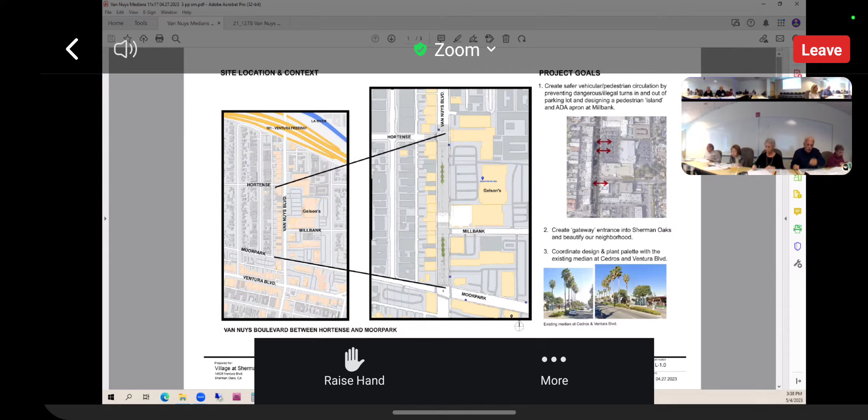On the lower red arrow on the first page of that image, that's where the ADA ramp and pedestrian island would be. If you turn to the second page, you'll see the two medians, and the image at the top shows the pedestrian island along with the ADA ramp. On the third page, you'll see a blow up showing the proposed ADA ramp, and in the middle of the street you see the pedestrian island, so that if somebody can't get all the way across, they have a safer place to stop.

When we presented this to you two months ago, we did not have the pedestrian island and we did not have the ADA ramp. So that has been changed as part of this proposal.

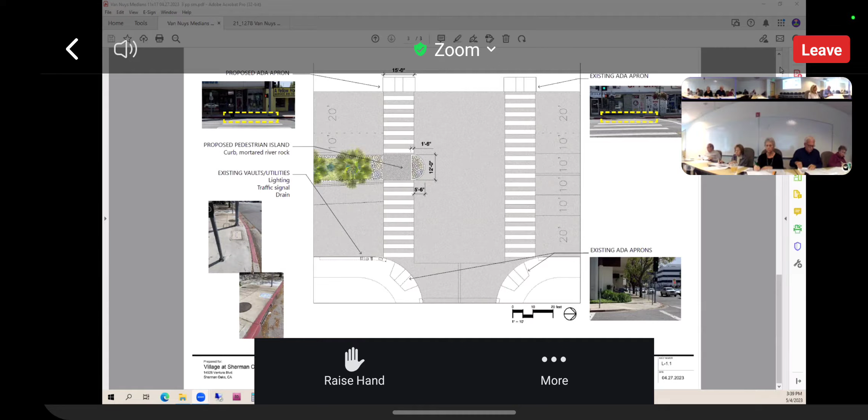We feel there's a multitude of benefits for this project, both in terms of safety for cars and pedestrians. There's also stormwater retention, and carbon capture because we're planting new plant material. We're really enhancing the beauty of the shopping district in the heart of Sherman Oaks with these two medians, and we're improving the wayfinding. There'll be a welcome sign as you get off the freeway coming into Sherman Oaks, so you'll have a sense of place for this part of the commercial district. I'll stop there and answer any questions.

Has DOT looked at your plans? Yes. We had a meeting with Mehmet and talked to him about these improvements and what we were planning on doing. We've also spoken to Tim Fremo at Los Angeles DOT about this.

We have support, including letters from the Sherman Oaks Homeowners Association, the Sherman Oaks Neighborhood Council, and the Vision Committee, which is part of the Plum or Land Use Committee for the Sherman Oaks Neighborhood Council. So there's three letters of support, not to mention that the Sherman Oaks BID, which is proposing this project, is behind it.

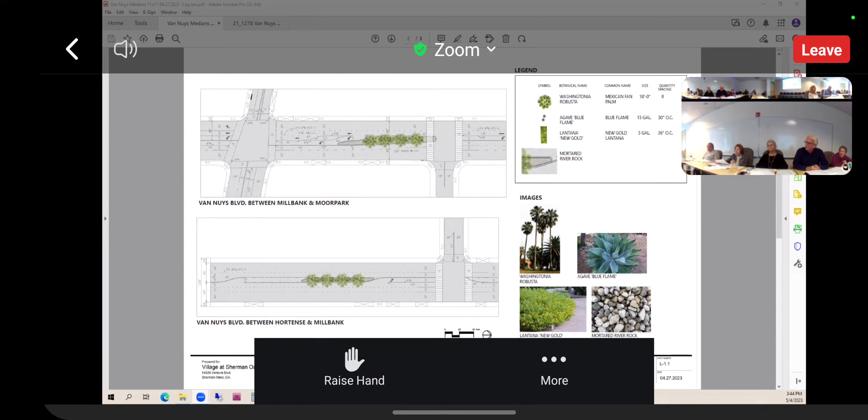We could change the word to storing it, as in a swale - well, there will be a swale, but it'll be a contained island. You're not taking additional water from the road. Right, we wouldn't want to do that.

Will there be any sprinkler system in the median? There will be - these are all drought tolerant plant material, but there will be a drip irrigation system.

Could you do the curbing so that it's able to absorb some additional water underneath? I don't think so, because at that point in the road, it's crowned.

It's crowned, and goes the other way - the water is running to the side, it's not running into the center.

But when you're putting in the curbing, you're going beyond the curb - you're cutting the asphalt, so you could do it. I know DOT will get in the way, the BOE and DOT will get in the way of that. Because if you're cutting into the road, you're only overcutting in order to put in your curbing.

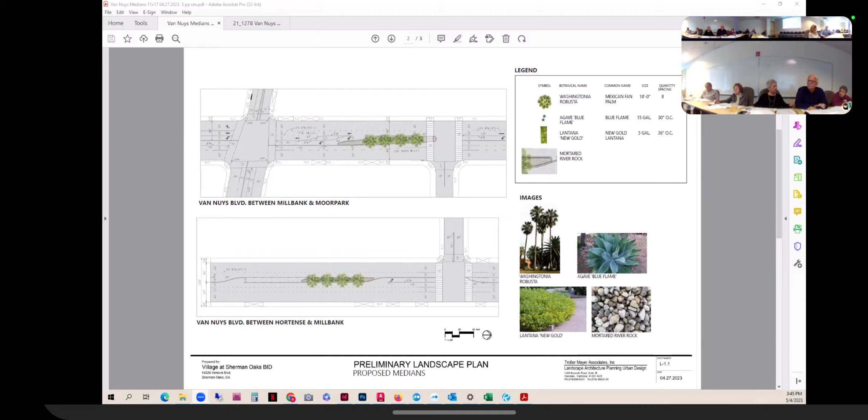And then you're backfilling, and you want to maintain that water flow away from that curb. Because of the crown of the road - as opposed to the outer curb? No, you can do that. I understand, we could look into it.

No, I mean the real retention should be at the side of the road. That would mean regrading the entire street. Yeah, you don't - that's too vast a project, too ambitious. That's for another project - give it a chance.

Dennis? Last time I mentioned, we just heard some median issues, right? I did, but that's not the only one - I mentioned the fire department.

Have you talked to the fire department? I actually drove this street after you made your presentation - it's very wide, doesn't seem like it's a problem to me, but it could be a problem for the fire department, because they want to use the middle lane when there's traffic jams. And they pushed back at us in the past.

So have you discussed that with the fire department? Because we asked you about that last time. Well, there are two medians, and there's a gap - they can drive right between them. Doesn't it block them? No, the middle lane, that's a turning lane, is used by the fire department when all the lanes are blocked up, in a traffic jam.

We will discuss this with the fire department when we have construction drawings. The two medians - one's 150 feet, one's 180 - they're separated by about, I want to say, about 250 feet. So there is room.

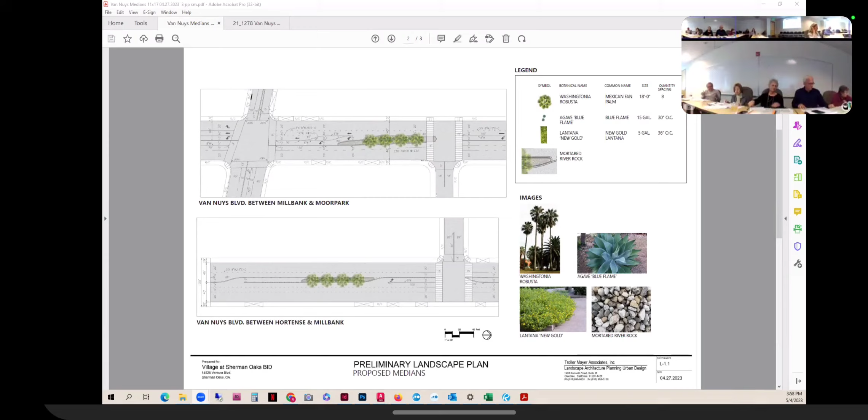Is it the 2035 plan you're talking about? No, no, it's something else, it's called Complete Streets. The planning department has a supplemental street design guideline, and the Bureau of Engineering has the complete street design, and yes, it's also in the mobility 2035 plan. What about Brian Wilson, our DOT contact?

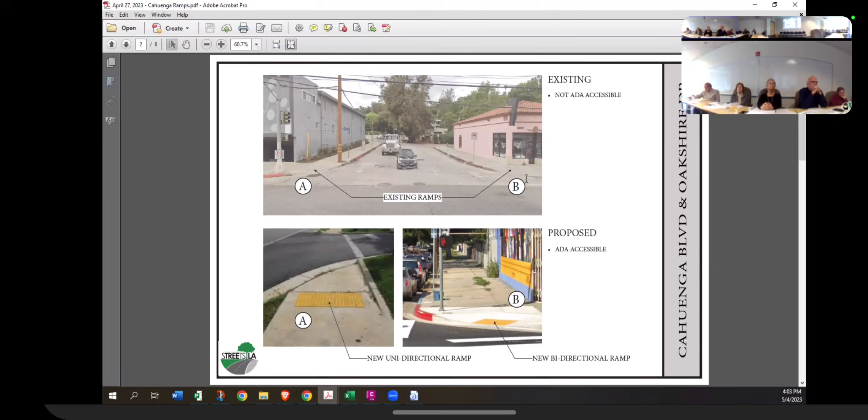There is an existing pedestrian crosswalk that's actually signalized. The issue is going from B to C - let me go back - there is actually no ramp whatsoever in that area. So our proposal is to put a mid-block ramp that's ADA accessible.

With that said, I'm going to move on to the next similar situation at Cahuenga and Broadlawn. Again, using the labels A, B, and C - moving on to the two ramps here at A, where they're supposed to be crossing to B, and at C, which is the mid-block across the street, which again is signalized. B is supposed to be a one-directional ramp that leads to A. Moving on to the crosswalk here at the mid-block, it's not existent and not ADA accessible.

So our proposal is to put another ADA accessible ramp in that area. The reason why the costs may be elevated in this scenario is that there is a driveway adjacent to, really close by, a traffic signal, and there may be potential for some signal modifications in order to accommodate that proposed curb ramp. With that said, that concludes my presentation. If anybody has any questions, please let me know.

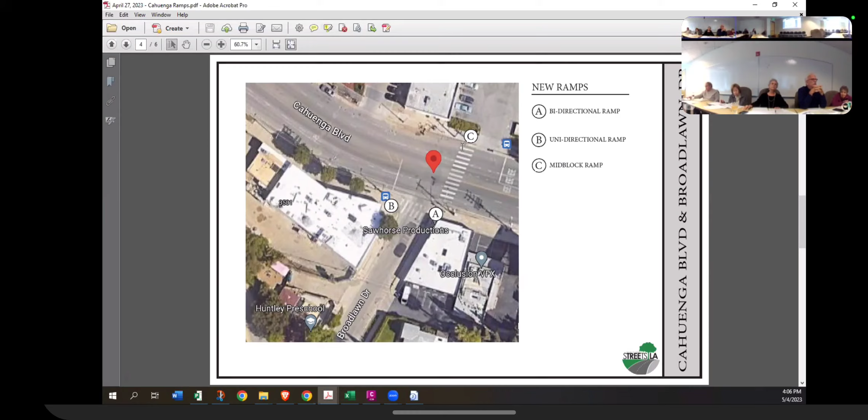Dennis asked, are these crosswalks at traffic lights, or mid-block, or uncontrolled? The answer: they have traffic signals, both of them. Yes, and they also put pedestrian push buttons as well.

Okay, any other comments? That was it for me. I just wanted to note public comment. Let's skip public comment if there's any.

Ms. Barry said: I'm confused by this motion, because the motion before this for Van Nuys Boulevard said to allocate the $683,000. This one never says allocation, and all it says at the end is we are seeking PRB support. Does that mean you're just asking for the PRB's blessing? I don't get it. There's nothing in this motion that says you're asking for the money, and therefore I don't think you can vote on issuing any.

Okay, this isn't the motion, we have to make a motion. Yeah, this is an agenda description, that there's a request for money. It's a request for support. Support may be financial as well as philosophical. I don't know, the one before says allocate, and it says allocate $600-something thousand. This one does not. It's a linguistic option.

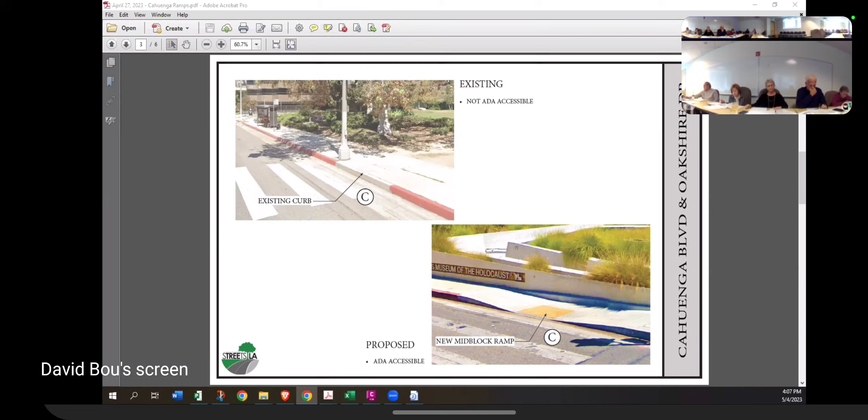Okay, I'll make... what's that? I'm sorry, any other, Lawrence? No? So I'm going to use the same motion. Closing public comment. Yeah, you could open public comment, well I can, okay I'll open it if there's anybody from the Cahuenga Pass area that would like to make a comment. Anybody? Nope, not seeing any hands.

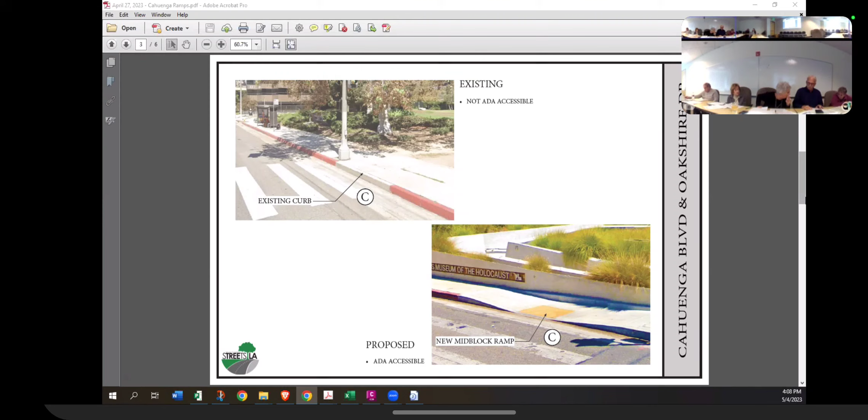Okay, all right, then I will make a motion. Okay, we'll close it. Can I make a suggestion? That's fine, do it, but we use the same one that we did before, changing the addresses and the amounts, and taking out the fire department. Sure, okay, so I'll do it. Lisa's going to, because she won't be able to read what I wrote here. And I may tweak it, but whatever.

Okay, yeah, so yes, I'm just going to change some stuff. Okay, okay. Well, we can, Petrus. Oh, Lisa?

Yes, hi, thank you. I just wanted to say I think this is a good use of our money when safety and ADA compliance is at the forefront of this project. So I hope we can support it. Thank you, okay, thank you Lisa.

All right, okay, so what's the status? If we were to continue this to the next agenda, why would we do that? Fine, to avoid any complaints that it wasn't properly noticed. How about this, it says action item, and support implies financial. Yes, it does.

Okay, I want to point out there are two separate items here - two separate corners, an intersection. These would be two separate motions, but we had two meetings before under one item. This would be one project that Streets LA would package together - one contract, basically a two intersection design in one project.

Okay, I'll try this. So, I'm bringing this motion. The Ventura Cahuenga Boulevard Corridor Plan Review Board supports the Broadlawn and Cahuenga, Oakshire and Cahuenga improvements for the ADA ramps. I don't have any addresses so I can't put that in. And there's a third one, right? No, that's a different project. Okay, got it.

In the amount of $764,000 from the 523 trust fund.

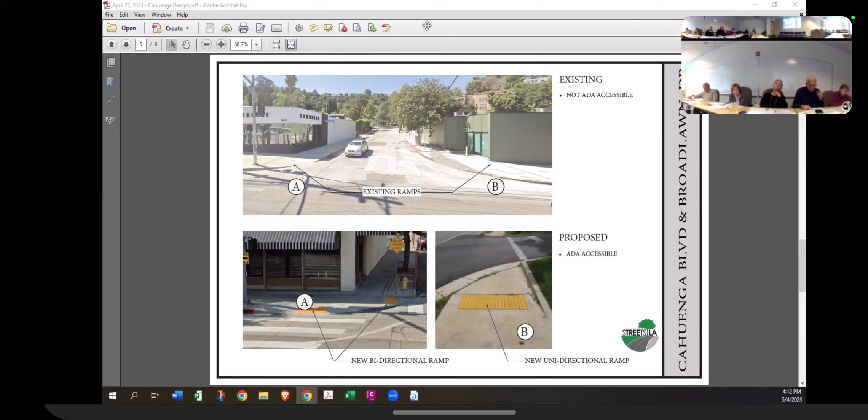10 minutes. Okay, now we're on to item E, which is the funding for upgrading the Ventura Boulevard and Ventura Canyon Crosswalk to a PHB Hawk signal.

This one's - I'll do this one. It's Mehmet. Hi, it's Mehmet Berker from Council District 4.

So this motion is again kind of looking at our signals now on Ventura. We've had some progress - we just talked about it in this meeting, hopefully having the three in Sherman Oaks done in the next two months or so. And we had Ventura Roads just open up, which is a rapid rectangular flashing beacon. Now, I would love that signal to be stronger as well, but that's a current LADOT standard, which leaves Ventura and Ventura Canyon.

So this signal currently - and Brandon can correct me if my terminology is wrong - it's an older style yellow flashing beacon. We would like to make sure all of our signals are as up to date as possible. So to upgrade this to a full pedestrian hybrid beacon, or Hawk signal, which I think you're all probably pretty sophisticated on by now - it's the three beacon signal on the mast arm overhead, which has red flashing.